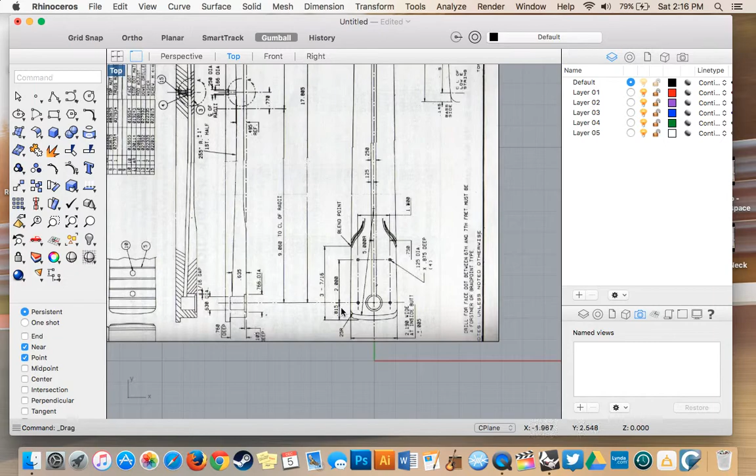Alright, welcome to part 2 of our instructional video on creating a Stratocaster neck. In this video I'm going to go over all of the different objects that we have to trace, and some of the things we're going to be omitting from our blueprint.

So let's get started right now with our bottom piece. This is kind of our main image that we're going to use to create our neck here. It's a bottom view of it. Here are the side views.

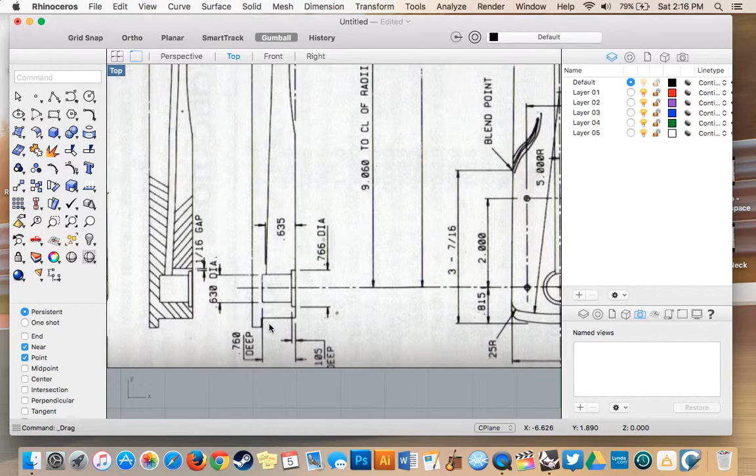One important thing to note first is this piece here. We are going to omit that from our entire blueprint. That is on an older style of Stratocasters that doesn't match up with the one that we're making.

We're also going to be omitting this channel right here where the truss rod runs through. You can see it from the side angle here, and it finishes up here.

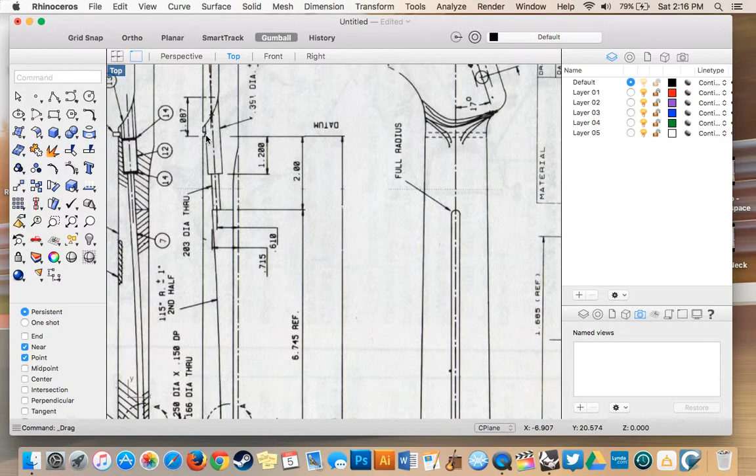We are going to be omitting this little piece right here where the nut of the neck goes, and we are also going to be omitting all of our peg tuning holes up here as well.

Alright, so let's get right into it. The same thing applies with the way we traced our blueprints for our bodies. We're just going to use our curve tool, and we're going to keep it in 2 degrees again.

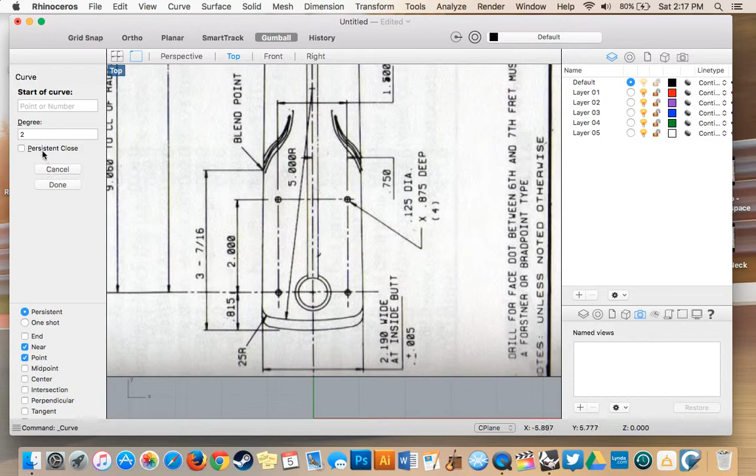And I'm going to start right in the center here, and I'm just going to go around, same way we did with our body models.

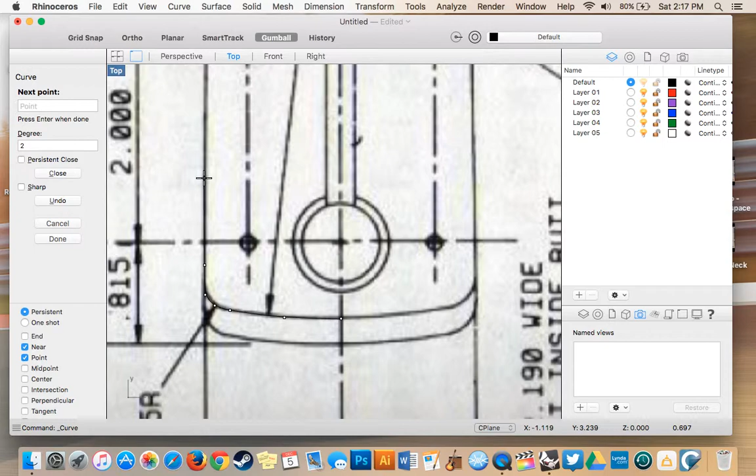I'm going to create a nice rounded arc here, and I want to make sure that I have as few control points as possible on the model. So anywhere where there's a straight line, I can really just run the entire length of it, and it should match up perfect.

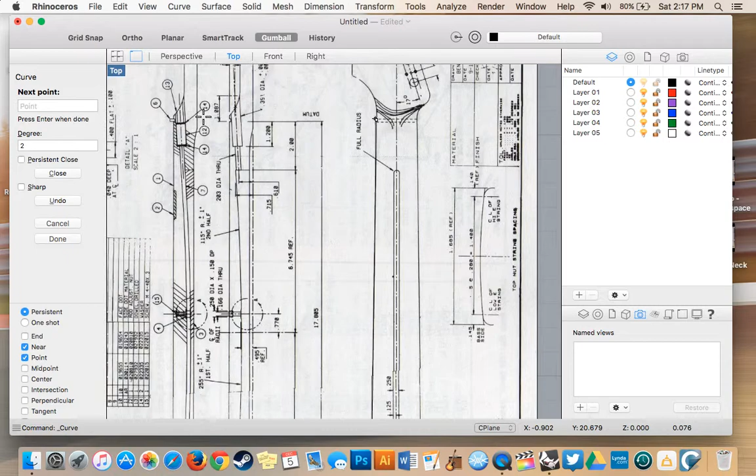Until we get to the nut here. So we're going to put our final one in a straight line on the nut, and then after that we're going to put several going down.

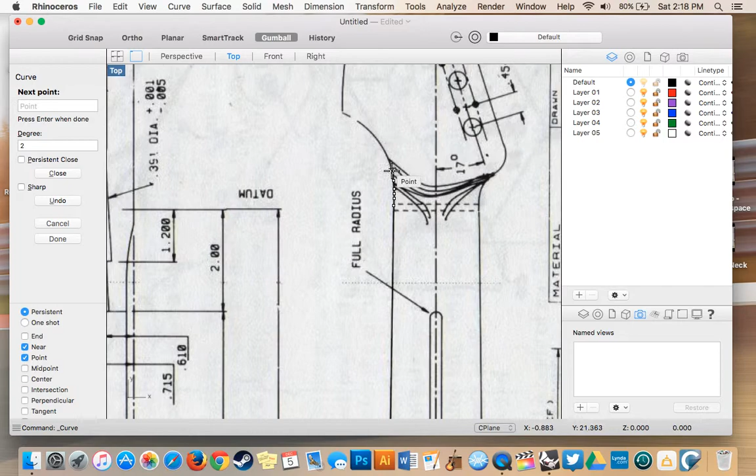You'll see why in a later video, because in our blueprint we're going to give this a curve going down, so we're going to need a lot of control points to make it a nice rounded edge, and then we can always delete them out after as well.

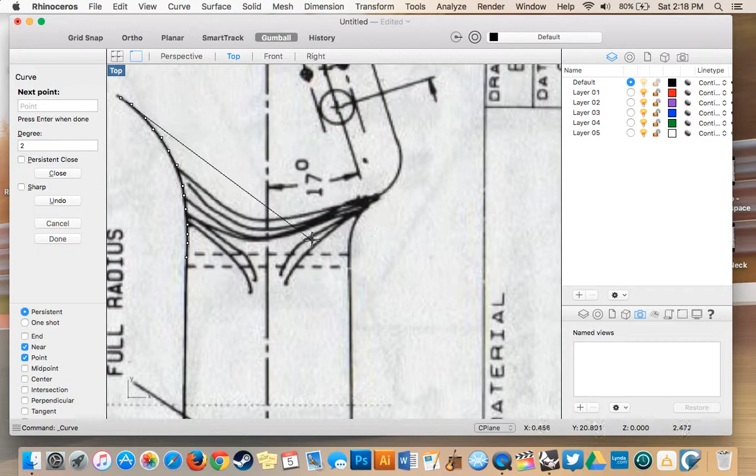So we only need a lot for this little section in here, and then on the other side as well will be right here, and then we can go back to just a normal amount that we would use. So I'll put 2 there nice and tight so I can make the corner, and then we're back to just spacing them out nicely up here.

Although this area is straight here, I'm going to place one back a little bit earlier, and then same thing as on the other side, I'm going to add a lot of control points in here so that we can give it that nice cutoff that it has on the side profile.

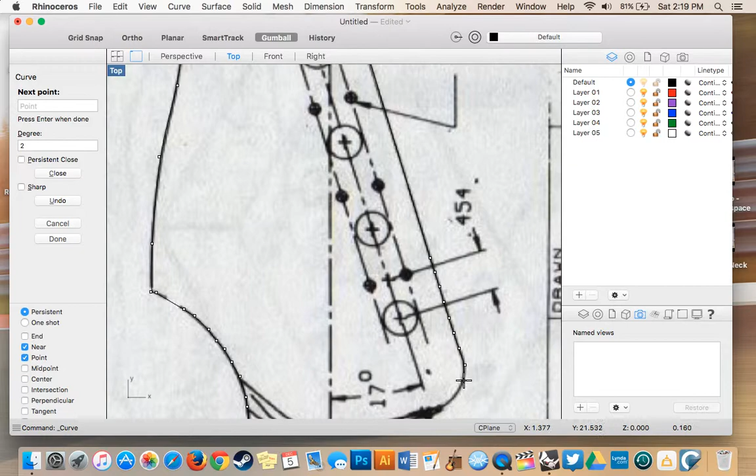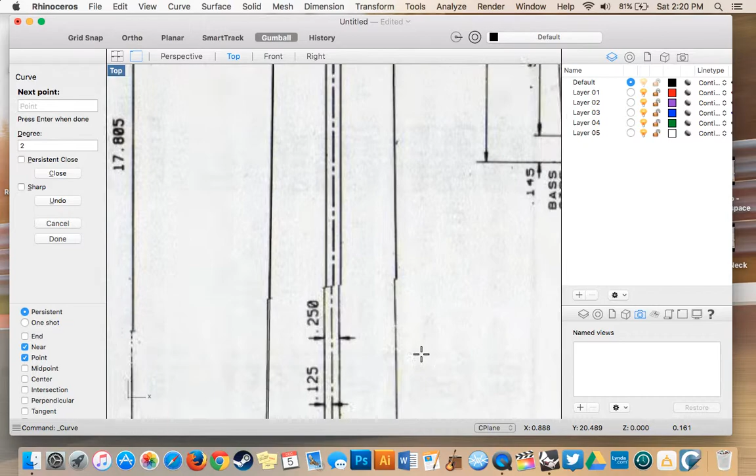I'm going to carry on doing that all the way up until I get to the nut there. And then I'm just going to go down in a straight line, same as on the other side.

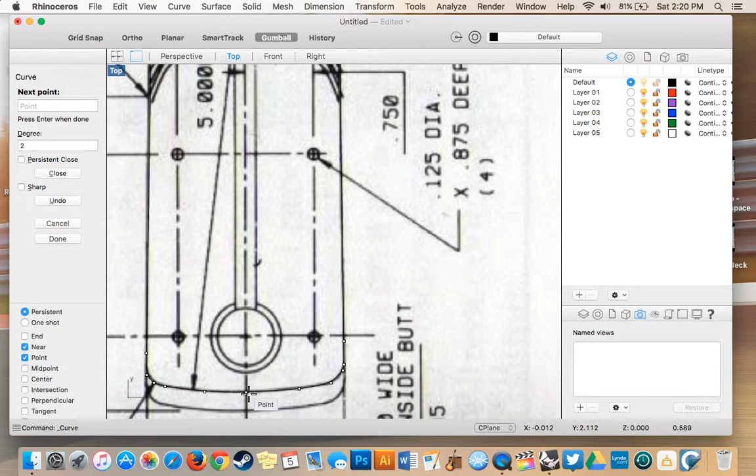I'm also going to change color so it's a bit easier to see exactly what I'm drawing. So I'll go nice green, that's easy to see on here.

So there are a couple more pieces that I want to trace on this bottom view. So the first is going to be, we drew the top section of our neck. Looking at it from the side profile, we just traced this line that runs all the way on the top here.

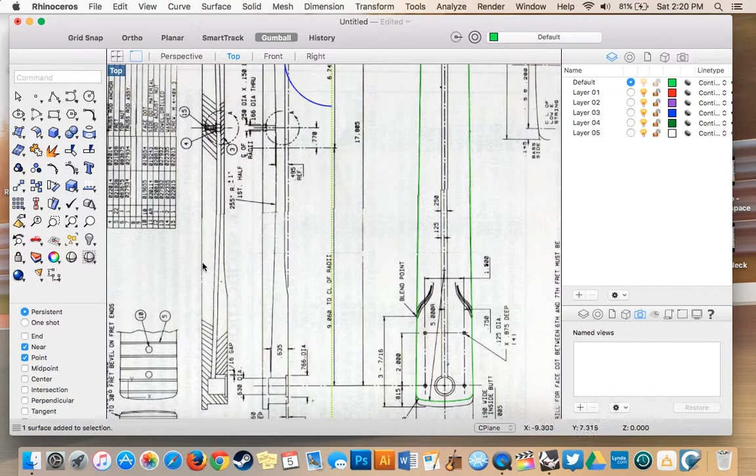And then we put all the control points so that we can move them down after, and then we're going to be flat there. So now I'm going to trace the bottom half, which is going to be right here.

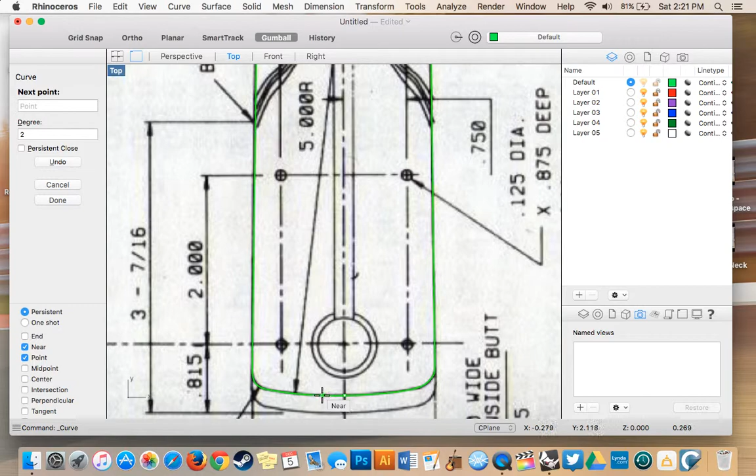So I'm going to go ahead, turn control points on. Using the near tool, I'm going to trace it as close as I can up through here until I get to this first line down here. So I'll add one there, and then turn off near and point tool so that I can draw it freely without it snapping to other objects.

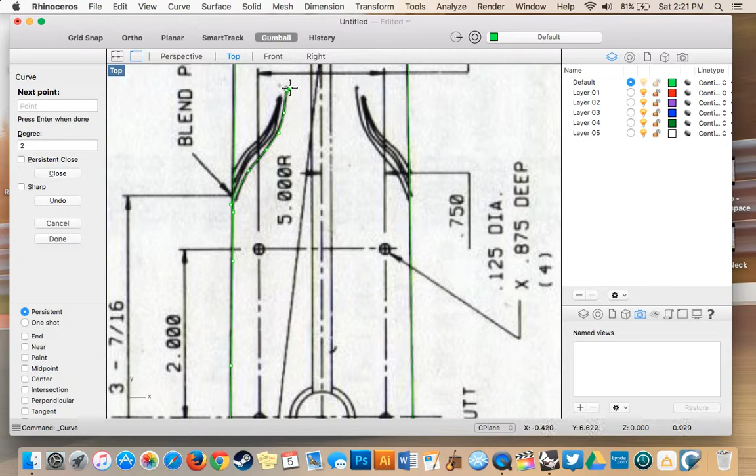And then I'm going to place one up a bit higher so I can get a nice rounded edge. And I'm just going to go all the way back down on this side.

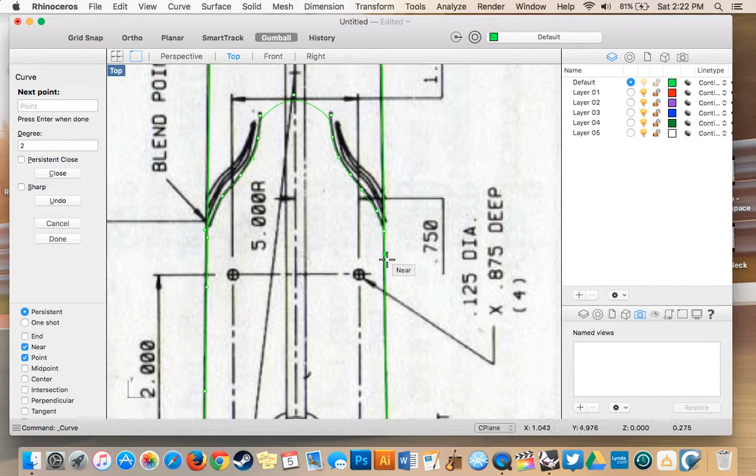So I'm going to turn near and point back on now. And then I'm just going to finish my tracing all the way around, and finish it up there.

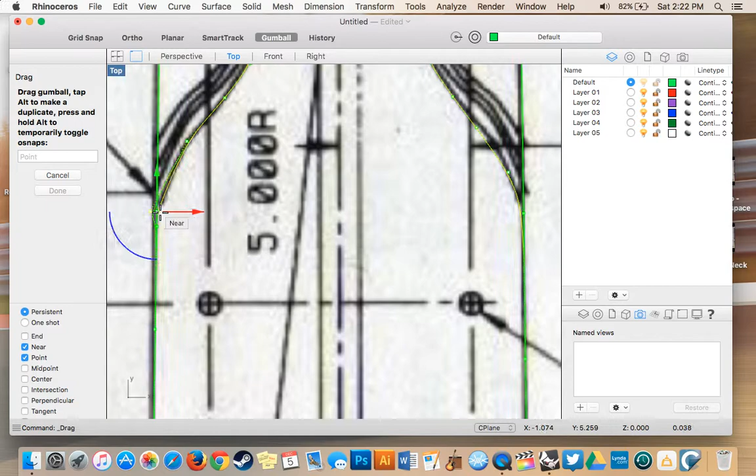So I saw that there was a small error over here, so I'm going to turn our control points on and fix that up. I'll just snap that onto the curve there. Turn control points back off.

So that's our bottom piece. Later on we're going to extrude that down and we're going to kind of chop it up into different pieces so we can draw surfaces between it.

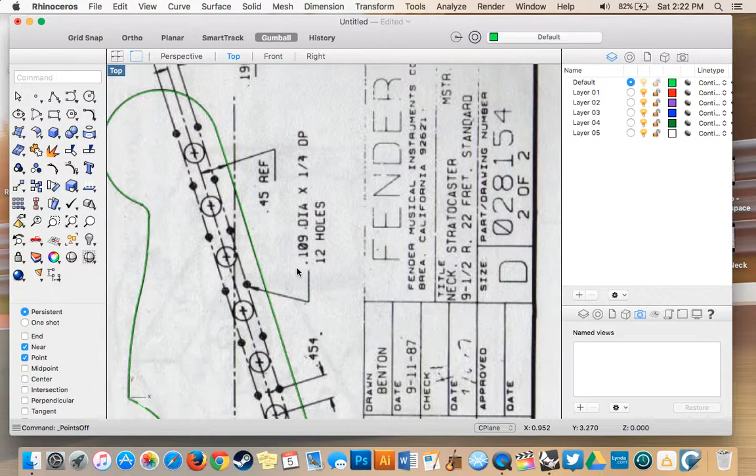So now I'm going to do the bottom section of the head of the neck here. So again, I'm going to have near and point on for now. And I'm just going to go around the head of the guitar neck and trace the lines out again.

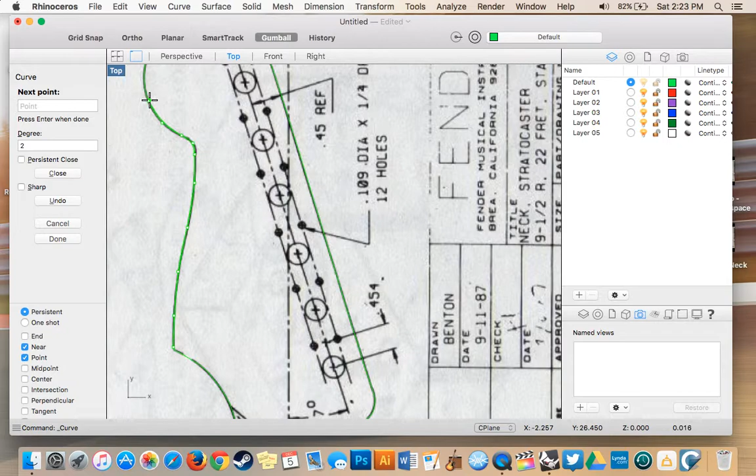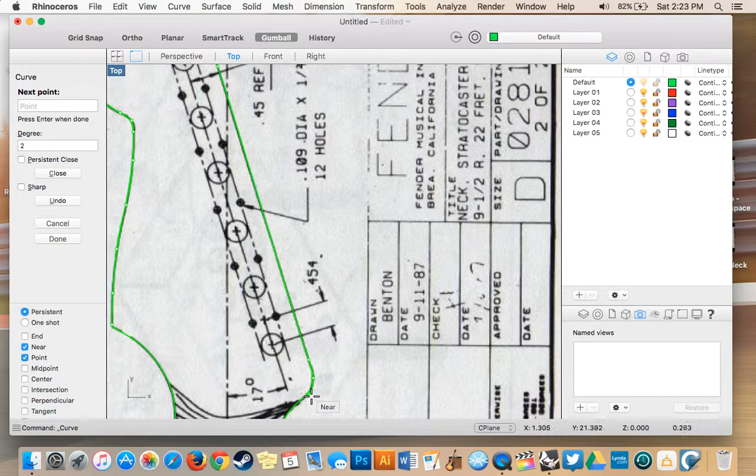So in our first instructional video, I drew a simple square, then moved it down and broke it up into a couple different pieces, connected the edges, and then drew a surface between them. So basically what I'm doing now is the exact same thing. We're going to move this piece down, and then we're going to connect it to the top as well.

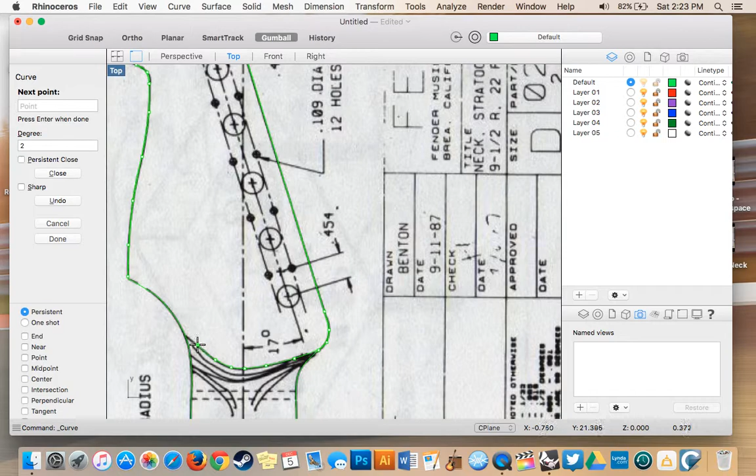So now that we're at this point here, I'm going to follow this line, so I'm going to turn off near and point tools so you can trace that line. Nice, and now that I get back here, I'm going to turn it back on.

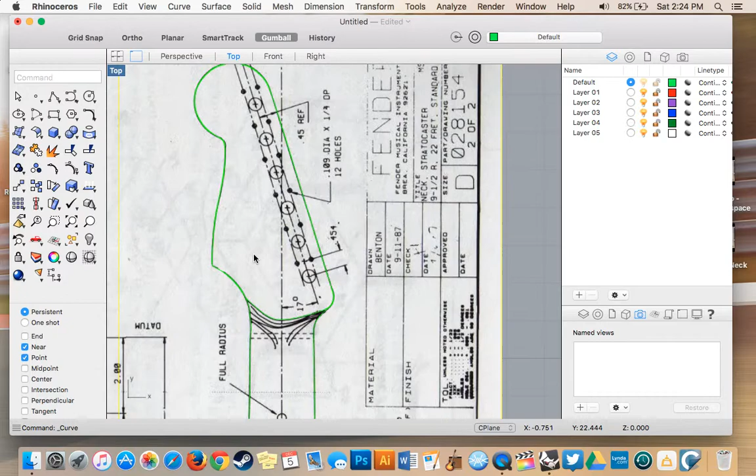Go around and finish that drawing off. So for now, that's all we're going to use for our bottom piece.

So now I'm going to go ahead and trace the side here just for a reference so that we can have a nice curve to look at later on while we're drawing.

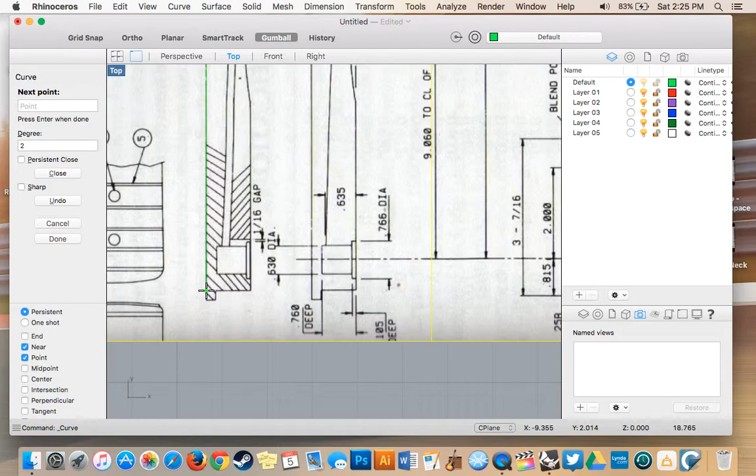Go ahead and press enter. So that curve is done. We're going to use that throughout this model to kind of guide what our curve should look like. I'm going to go ahead and trace the back.

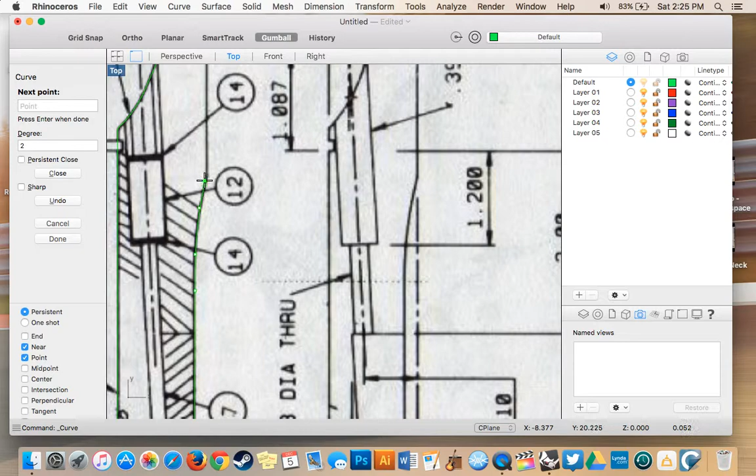Go ahead and press enter. So that's going to be all we're going to need to trace for now.

So I'm going to go ahead and keep the blueprint, but I'm just going to move it to a different layer. I'm going to click the blueprint, right click this layer over here, and move object to this layer. Just going to rename it blueprint.

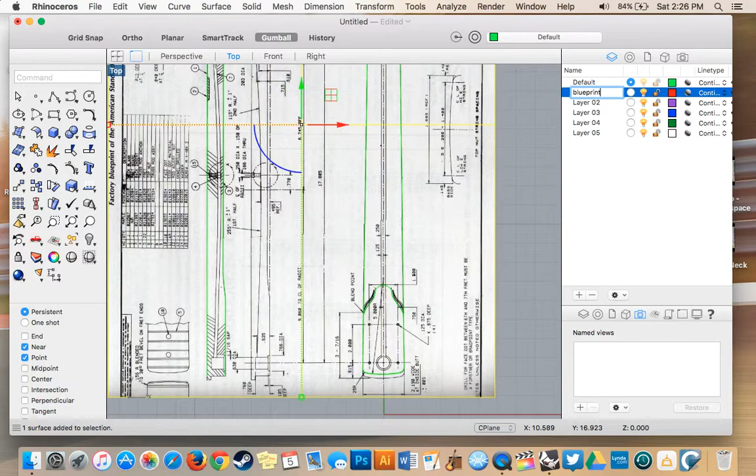And I'm going to hide it for now. So it's really important to keep everything labeled nice and properly so it's easy to navigate around our blueprints and our models. So I'm going to rename this layer outline.

And that's all we're going to do for this step. In the next step, we're going to talk about extruding our curves down and kind of connecting them all the way around.